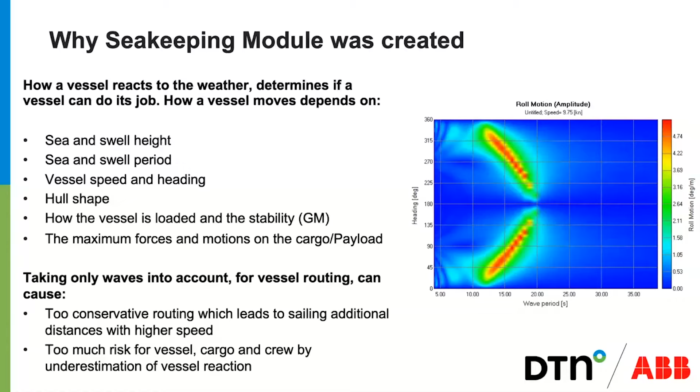I added a few slides from the last webinar in 2019, and it was more the technical part about Seakeeping. At the end of this webinar, we will share the recording itself, but we also will send a link to the webinar we did in 2019, which is more technical. It's more about what's Seakeeping, what is octopus Seakeeping, what's 2D motion prediction, 3D motion prediction, and how does it all come together in the SPOS system, so you can use best of both worlds.

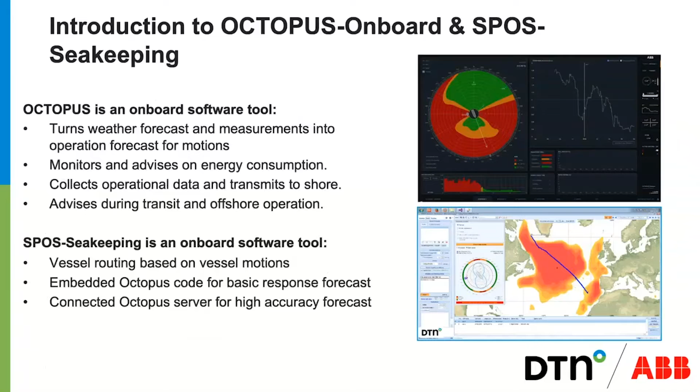Use the DTN SPOS solution together with the ABB octopus solution, from weather forecasting to onboard sensors, routing algorithms from our side, then predict motions from the ABB side, and use them all in one solution.

So you can take into account sea and swell height, sea and swell period, vessel speed and the course of the vessel - the difference between different kinds of hull shapes makes a big difference. Stability, the GM, and the forces and motions on the different kinds of cargoes which are in or on the vessel itself.

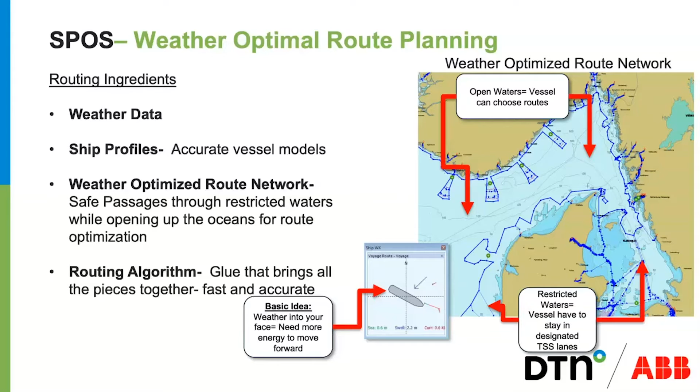So now we have the ingredients. So how do we do it? What's the process? Again, first part, weather ingest.

You have to ask yourself, do we have the right data? And always use the latest weather data. As a meteorologist, I'll say that again: always use the latest weather data.

Now, safety settings. What safety thresholds are critical to your vessel on this voyage? So standard parameters we have, such as wind and waves, swells, tropical cyclone distances, icing, etc.

But we also have derived parameters, such as in Seakeeping. We have roll, pitch, slamming, synchronous roll, parametric roll, surfing, high wave groups.

And within the algorithm, we offer the ability to warn or avoid. If you warn, the algorithm will give you a route that will, at the end of the route, warn you all the times that your threshold has been breached, or avoid, as it sounds, will actually avoid those critical thresholds.

Next are the restrictions. We have ice restrictions, vertex. You can do user-defined restriction areas and more.

Plus, we also have the ability to put in waypoints. So not just where you don't want to go, but also where you do want to go as part of the algorithm.

Vessel settings: is it a laden or ballast voyage? The vessel model you can select from our inventory, adjust the fuel speed curve, or use our trim advisor module.

And within SPOS, we have different routing types, such as fixed speed, which is used for charter party or slow steaming, variable speed, speed up or slow down or miss weather features, fixed ETA, set when you need to be there and get the best, most economical route to get you there on time.

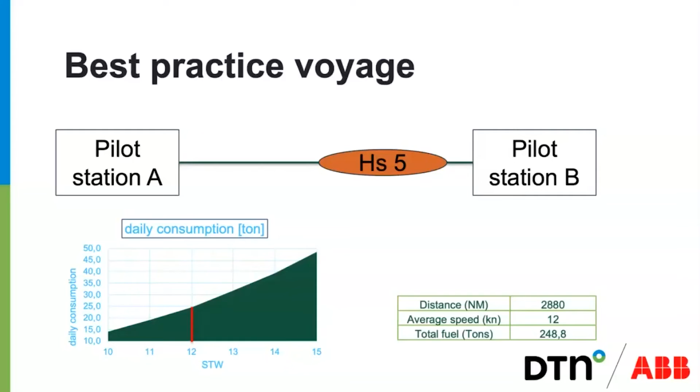In this case, you go as stable as possible in the shortest route from point A to point B through the difficult conditions. If we take the next step...

This was going a bit too fast. You sail in a stable condition at 12 knots, same as the previous voyage, until you hit the bad weather, then you decide to reroute. But to maintain your ETA, you have to deviate and increase your speed, in this case to almost 14.5 knots. The effect is that you make more nautical miles at a higher speed at the second part of your voyage, which influences your fuel consumption.

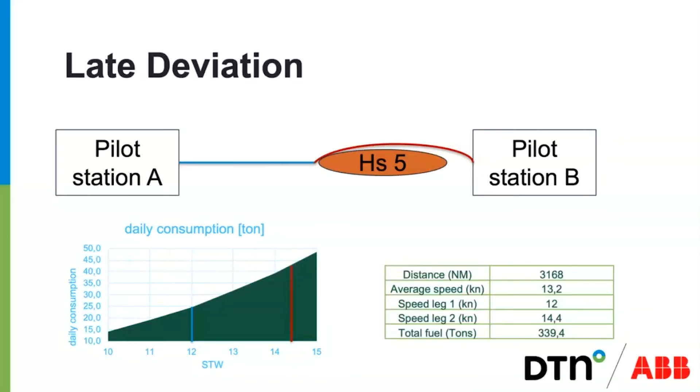This is just when you sail up to this weather and make the assumption you cannot go through it. If you then check what could have been the alternative - if you have your process in place for making assumptions and checking for possible rerouting - maybe one option would have been to reroute at an earlier stage.

If you make the assessment, you need what Matt already said - you need to always take into account the latest weather forecast, but also the boundaries of your vessel. Can we go through the bad weather predicted maybe 2 days ahead? The earlier you make that choice and the better you adapt, the bigger the potential saving is.

Because if you reroute at an earlier possibility, your total distance will be less, and especially the effect on your average speed will be lower. In this example, you start your voyage as if the weather would be fine at 12 knots, but when you deviate, you have to speed up to maintain your ETA - in this case to 12.8 knots, leading to a total fuel consumption of about 288 tons.

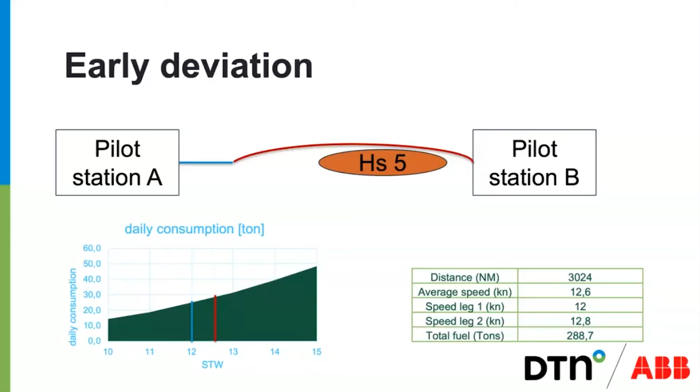If we combine this, you get a basic overview of the options for this kind of route and the difference in cost. The header of this webinar is to save 1.5% for any vessel. Of course this is flexible, but if you compare the different options...

If you do it based on vague limits - one captain could say I will always deviate around 5 meter wave height independent of conditions, and another would go to 7 meters, or another would take into account the actual behavior of the vessel. Taking into account the actual behavior of the vessel at that moment would lead to a late deviation, because you sail until it becomes too dangerous or not comfortable enough, and then you deviate - that's a late deviation. So taking a risk can cost a lot of additional fuel.

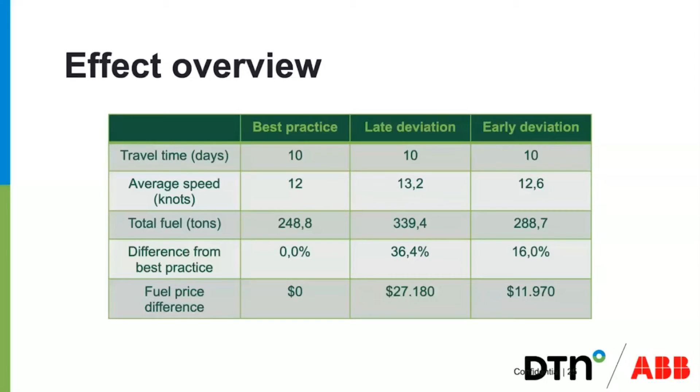So in this case, the most important part in these assumptions is to limit the gray area. If you go from point A to point B, you have several options to reach point B, and you want to reach it in a safe and efficient manner. But within that, you always have a gray area, and the target is to limit it.

In our view and experience, operation depending on vessel behavior is a huge step forward, instead of only doing it based on a limit of wave height. It's important that the decision support is available as fast as possible to the master, so he can make his decision based on the best data available.

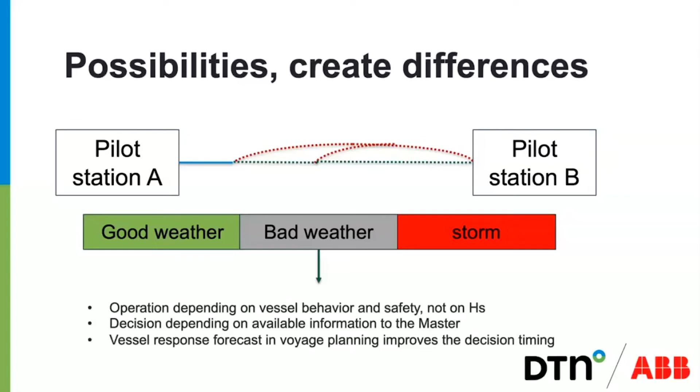The earlier you can make your decision, the better it is for the overall view. To summarize, what we aim to do with the Seakeeping Assistant is to limit the gray area where different plannings can be made depending on conditions. Different plannings depend on experience, on the actual condition, what somebody feels. It can deviate between rerouting, waiting for the bad weather, or just going through it. This is what we try to limit with our solution.

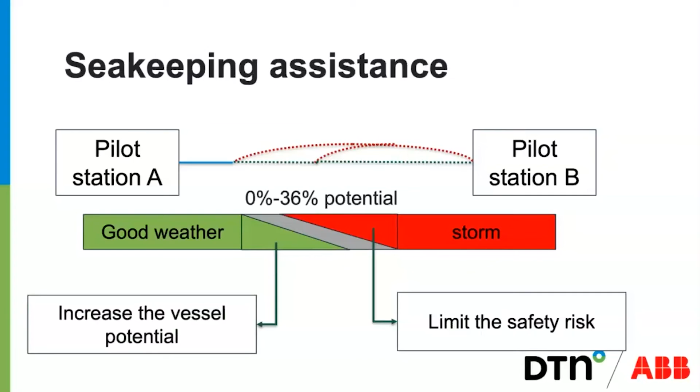Thanks, Jaap-Jan. Thanks, Matt. I think the conclusion of this webinar is if you combine the solution from ABB, Seakeeping, Octopus Server together with SPOS, putting the two together, you can do something more than just optimize the route and optimize on safety.

Basically what we are saying in this webinar is you can use Seakeeping on any given vessel. Out there everybody knows Seakeeping is being used on container vessels. Yes, we have a lot of container vessels equipped with Seakeeping and Octopus Server, but in this webinar we are showing it's not just containers. On any given vessel you can reduce your cost by 1.5%, and that's a lot of money.

Q&A. If you have any questions or more questions, just put them in the Q&A. I've received a few questions on ship profiles.